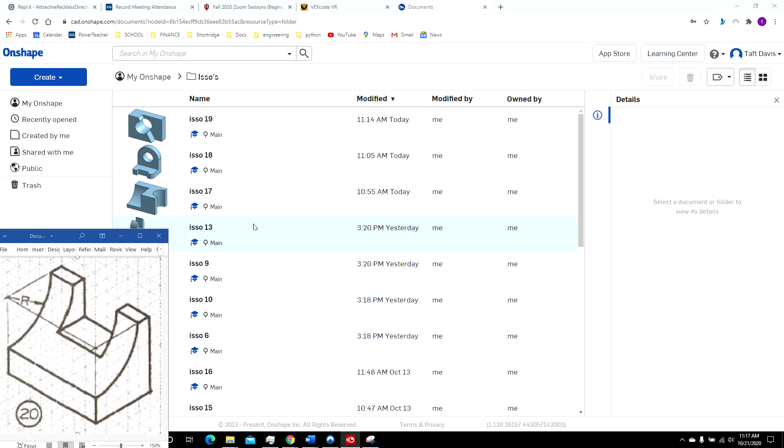All right, now we're going to work on the last one, isso number 20. I'm already in my isso folder, so I'm just going to click Create, Document. I'll call this isso 20.

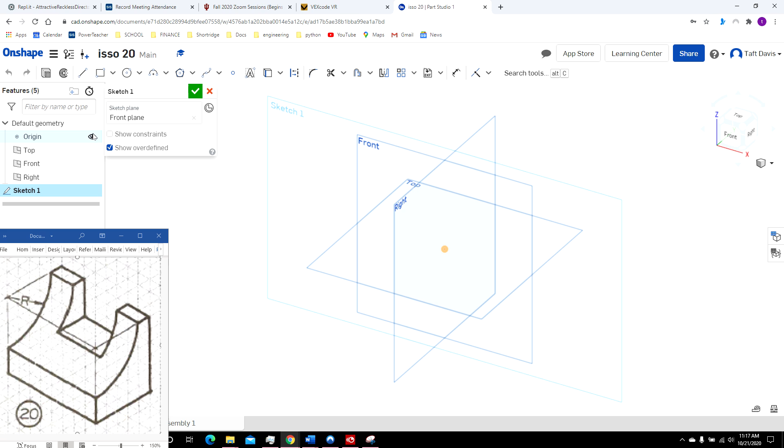All right, I want to make this box and go ahead and cut this section out on my first step. So I'm going to work from the front. I'm going to click Sketch, turn off the visibility of my origin, top, front, right, so I've just got the plane I'm working on. I'll click Front here.

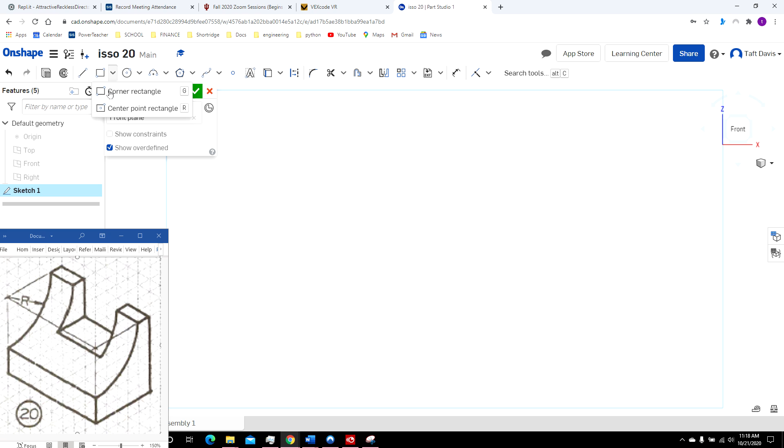So my rectangle is 8 by 6. It doesn't matter if I use the corner rectangle or the center point rectangle. So this was 8, enter, by 6, enter.

All right, now I'm going to go ahead and create this rectangle up here before I extrude it. I could go ahead and extrude this 5 inches, finish that, and then go back in and cut this out. But we can go ahead and do that in one step.

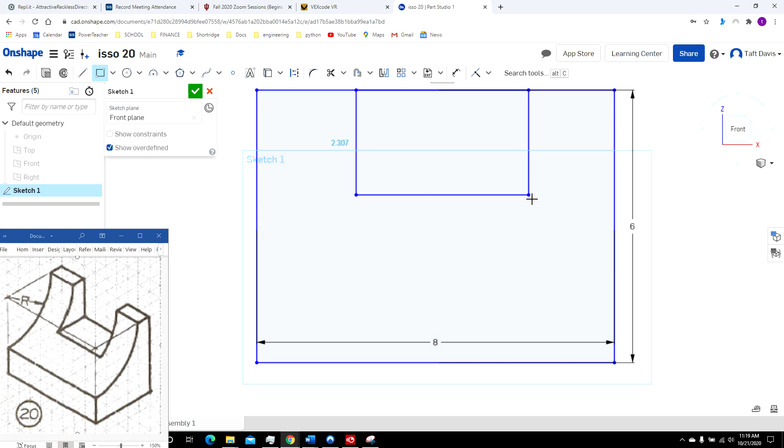Okay, so this rectangle is 3 inches by, well let me count up here, 4 inches. Now this time I do want to use the corner rectangle because I want to start on this line. So when it turns yellow, I'm going to left click and just drag. Pull this down, okay. This was 4 inches across, so I type in 4, enter, then 3, enter.

Now I need to get it the right distance from the edge, so it's 2 inches from each side, so it doesn't matter if I dimension it on this side or this side. So I need to come up here to the dimension button, type on dimension. When the line turns yellow, I left click. I come over, when this line turns yellow, I left click one more time. Click again and type in 2. All right, so now this is centered.

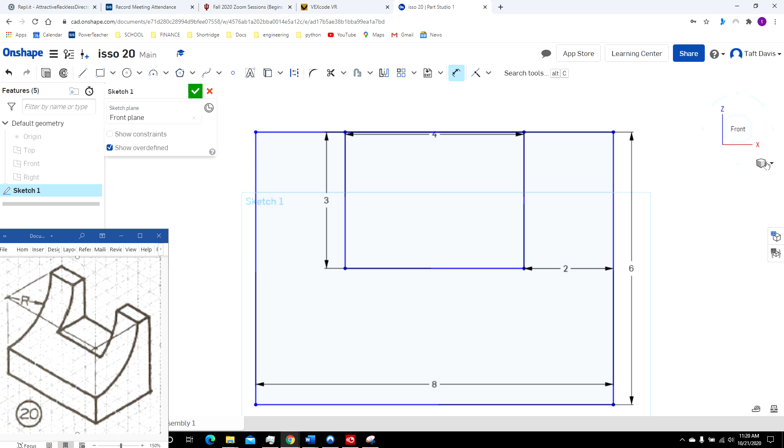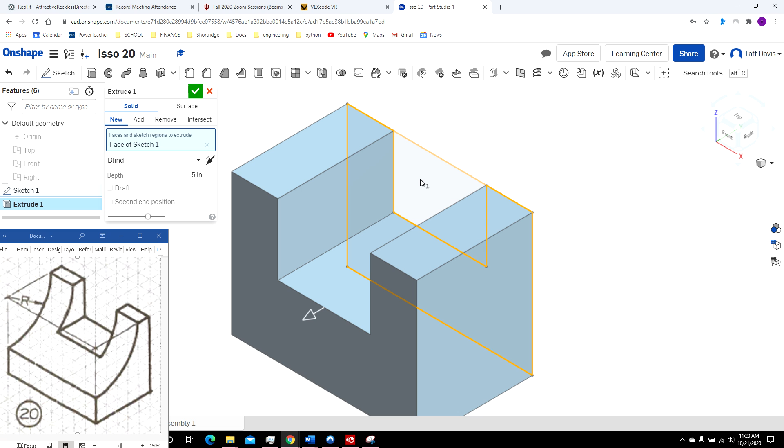Click on the isometric view. Now I want to extrude it 5 inches. Extrude, 5. And then I click inside the little box and that just removes that from the extrusion. And I click OK.

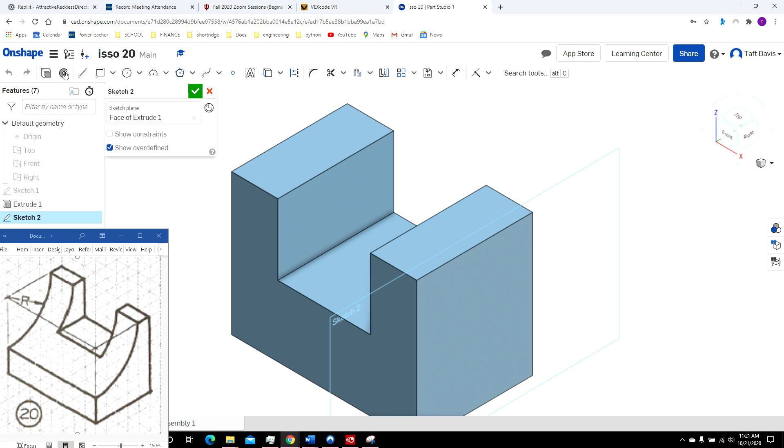So now I just need to cut out this corner circle right here, and it has a diameter of 4 inches. So I'm going to work from this side. I'm going to click Sketch, and I just click right. I'm going to use the center circle.

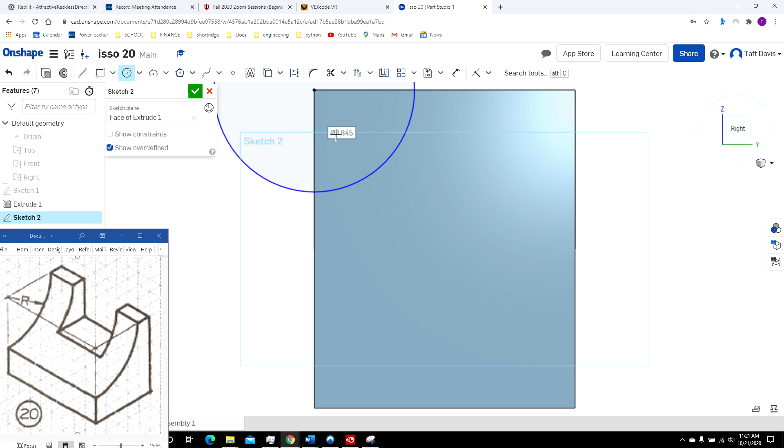I'm going to come up here on this corner, left click, drag down. Now it had a radius of 4 inches - we're looking for the diameter here because it's got the circle with the line all the way through it. That tells me that it's looking for the diameter. So the diameter was 8 inches.

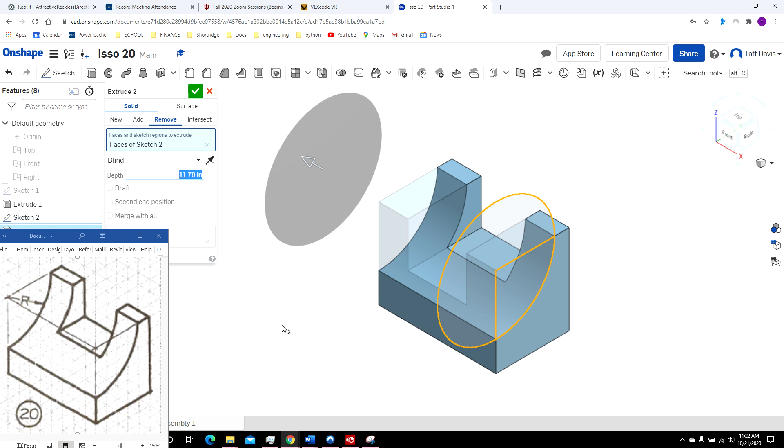Now I'm going to click on the isometric view. We're going to extrude this. Again, I want to remove - we want to cut that part out. And I could type in 8 inches, or you can just grab the arrow and just make sure you go all the way through. Doesn't matter if you go too far, as long as you get all the way through. I click Done.

And that's ISO number 20.